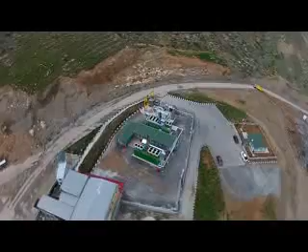Once more again, the new innovation in Turkey by Malatya Metropolitan Municipality: the first and only facility in Turkey that generates electricity from unsanitary disposal.

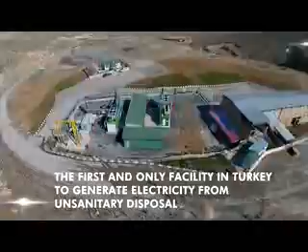Effluvia, fire, and carbon emissions had seriously been causing a threat to quality of life. The problem has increasingly continued as a consequence of population growth, rapid urbanization, and industrialization.

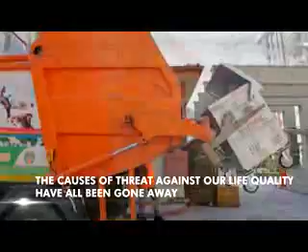We, Malatya Metropolitan Municipality, take justified pride in activating the first and only facility in Turkey that generates electricity from unsanitary disposal, by rehabilitating 101 acres of landfill in order to produce a permanent solution for better quality of life.

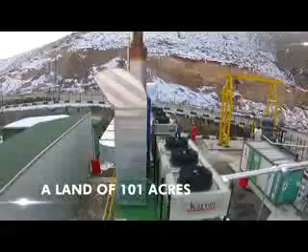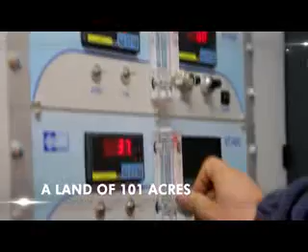The energy facility, equipped with modern technologies, meets the illumination requirement of approximately 10,000 houses with 2.2 MWs of electricity generation per hour daily.

We put an end to environmental pollution, similar to the air pollution that occurs by 1,200,000 liters of fuel burnout.

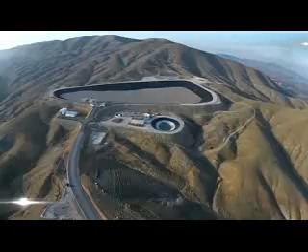With our environmental projects as Malatya Metropolitan Municipality, we sorted out the issue of waste storage with the new landfill facility, located on 128.5 acres of land.

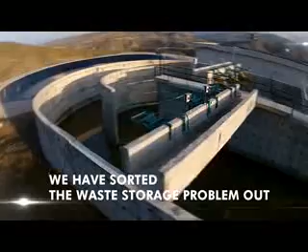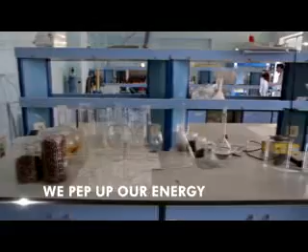We continue to work on energy production technology as Malatya Metropolitan Municipality. We are planning to supply the illumination needs of 50,000 houses by increasing electricity generation from waste gases to 8.5 MWs, with energy production projects from gasification, LFG gas, and biogas tanks.

We accommodate with energy for your future. Malatya Metropolitan Municipality.

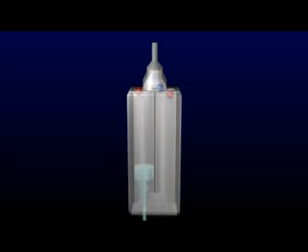This video presents a new invention, a revolutionary fluid currents energy converter device, combining double-acting fluid pumping apparatuses and moving pontoon and racks to convert ocean waves or flowing currents into electricity. The two fundamental mechanical devices are the movable device and the fixed device.

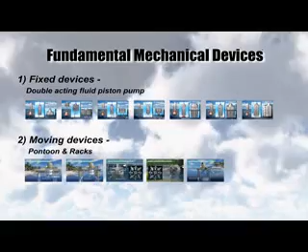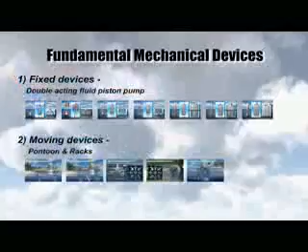Double-acting piston pump: a piston is arranged to reciprocate as its piston rod is actuated by a float. When the float moves up as a rising wave passes, it pushes the piston upward, and the resulting dynamic flow of fluid closes the left inlet by the ball and fluid is pumped out through the center top outlet. At the same time, it causes fluid to flow through the right-hand inlet into the chamber.

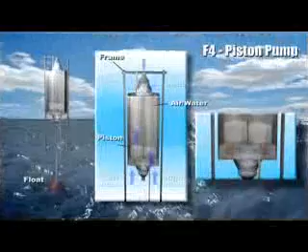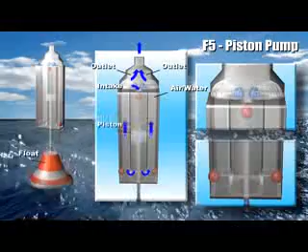When the float moves down, it pulls the piston downward, and the partial vacuum generated at the left-hand inlet causes the top left ball to open and allow fluid to flow in. At the same time, fluid pressure on the lower side of the piston becomes higher and causes fluid to flow through the bottom channel into the right-hand chamber and pump out through the center top outlet.

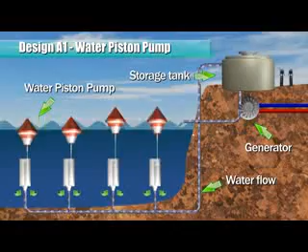Based on the fundamental piston reciprocating working principle, many designs of energy converter can be configured. In this example, a submerged pump is operated to pump water to an elevated storage tank. Water from the storage tank is channeled to rotate a fluid motor or a turbine, which in turn rotates a generator to produce electricity. An air piston pump is disposed above the water level.

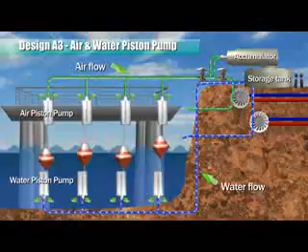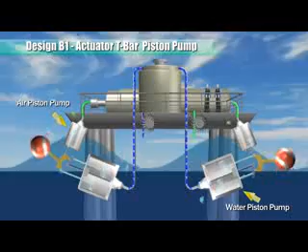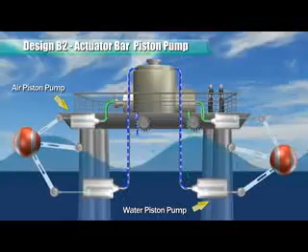A T-shaped actuator bar is pivoted to the body of the pump such that when the float is pushed up and down by wave forces, the actuator bar oscillates about a pivot and, in turn, reciprocates the pistons. This actuator bar pump system uses the above single piston pump and a float pivoted to rise and fall with wave forces.

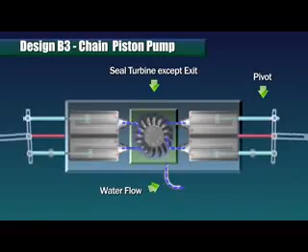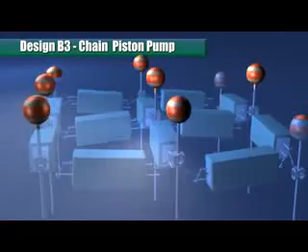Each pump body is configured to include two actuator T-bar piston pumps arranged end-to-end with a sealed turbine disposed in between. The piston of two pumps is interconnected and is linked to a floating pontoon.

Now a paddle is pivoted on the pontoon such that when the ocean undercurrents oscillate the paddle, it reciprocates two pistons to pump air and water in a double-acting manner. This design oscillates the actuator T-bar.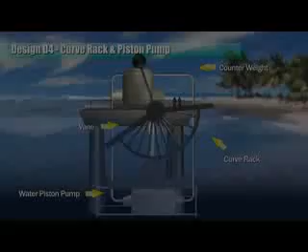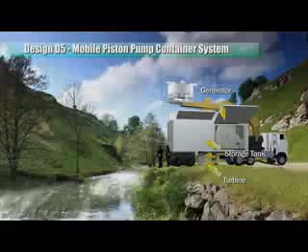When water currents flow through the face of the pendulum member, a lifting force is generated and the pendulum member swings and oscillates. This rotary wheel and piston pumps assembly is suspended from a boom on a mobile trailer.

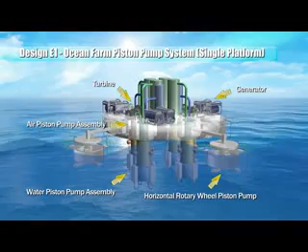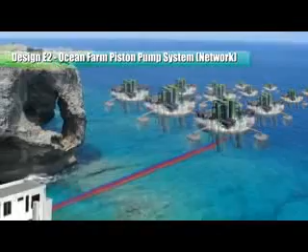A plurality of one or more of the above piston pump configurations can be connected in a network. An ocean farm system comprises a number of network combinations of the above devices, be they the same, mixed, or different configurations, being linked mechanically or electrically.

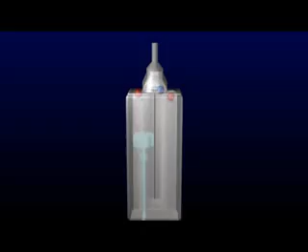This concept design is simple and unsophisticated, thus allowing us to harness huge unlimited renewable energy from our surroundings. If you can solve the power, you can solve almost anything.